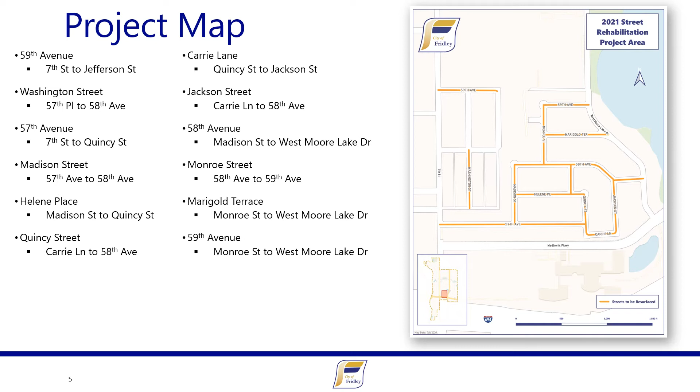The tentative schedule for the project includes a neighborhood informational virtual presentation, which you are currently watching now, and an opportunity for resident feedback through phone calls, emails, or meeting requests with staff on site through the end of September and the first couple weeks of October.

Staff will then take the feedback received and create a feasibility study and set the improvement hearing date for the October 25th council meeting. We will then have the preliminary assessment hearing at the November 22nd council meeting, and award the project to a contractor in February of 2022. We will plan on beginning construction around May or June of 2022 and plan on completing the project in September of 2022.

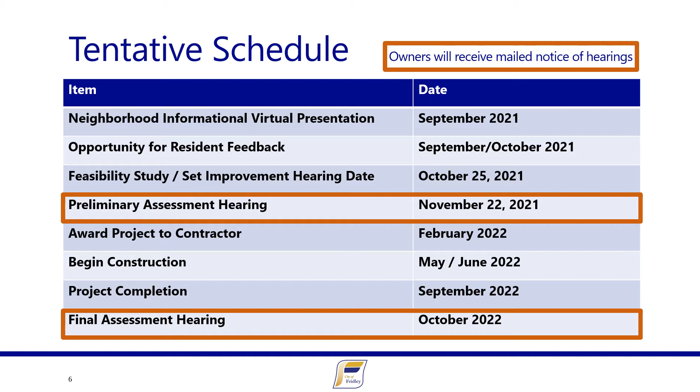This project is included in the city's comprehensive street plan. Council adopted the plan for maintaining the city's streets and alley system. Fridley has approximately 81 miles of local streets and alleys. The city has spent $4.1 million in pavement rehabilitation over the last 5 years. On the right side of the screen, you can see the city's 10-year outlook in the street resurfacing plan. The area in the circle bubble is the 2021-01 street project.

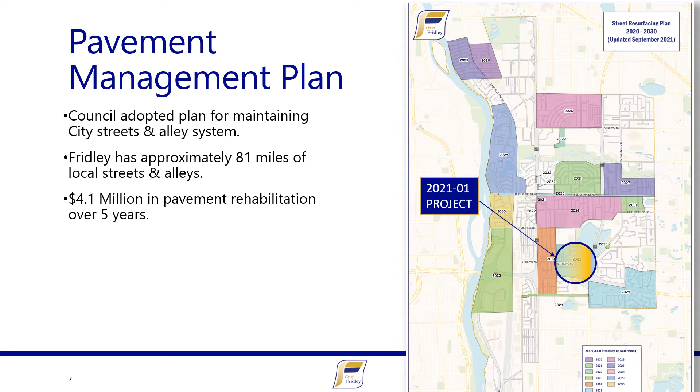The comprehensive street plan is created based off the street program analysis. When considering selecting a project, we look at the items below; the items in bold are the main reasons for the 2021-01 street rehabilitation project. We consider the street condition and ranking, which we do yearly inspections of the streets in the city. We look at the time since the last major maintenance, which in this case for the neighborhood, the original construction was in the 1960s and 70s.

with a little bit of seal coat happening in the early 2000s. We work with our Public Works Street Department on the high maintenance levels, and we look at the available funding for the project.

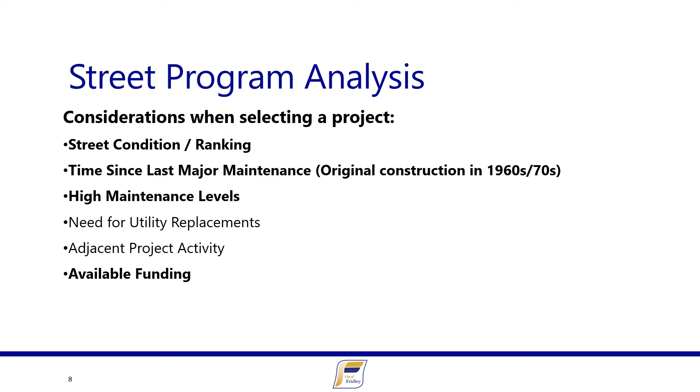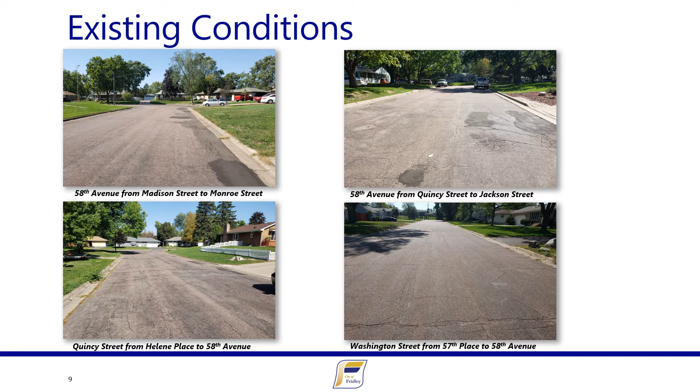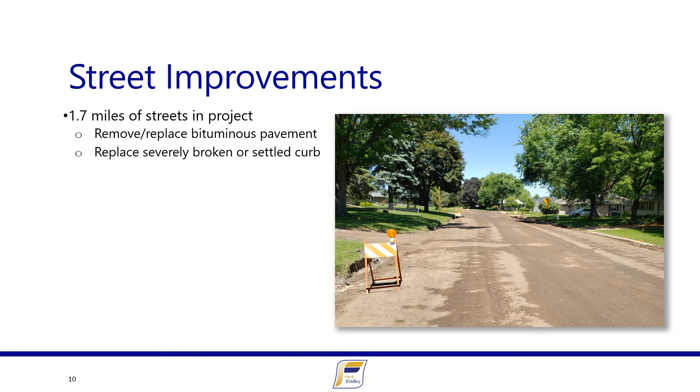Street improvements include 1.7 miles of streets in the project, where we will remove and replace the bituminous pavement, and we will also replace severely broken or settled curb along the project area.

There will also be utility work in the project area. This includes replacing the water main on Marigold Terrace from Monroe Street to West Moore Lake Drive. We anticipate no sanitary or storm sewer work, as they are in good condition. We will work with other private utilities in the area to make sure any work they need done gets done before the street project is completed, so they aren't coming back and ripping up our brand new street.

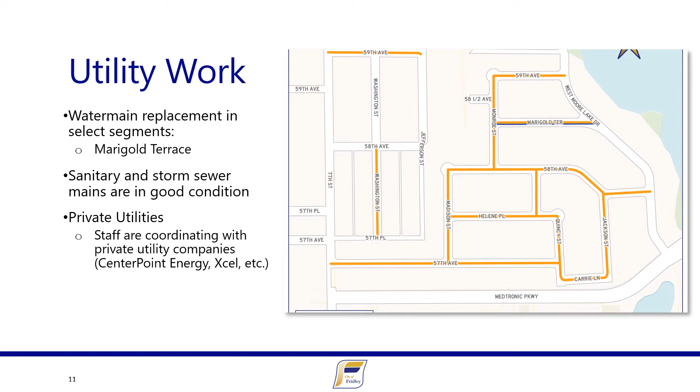On-street parking: we ask that you please do not park on the street during construction.

Temporary water shutoffs: city water will be required to be temporarily shut off during hydrant and valve replacements. This might require a shutoff for a few hours while they're doing the work. During water main replacement, areas will be placed on temporary water for a short period of time until the work is completed.

Project updates and notifications: residents will receive notification prior to significant work. This will include major project milestones, road closures, water shutoffs, utility repairs, and driveway coordination.

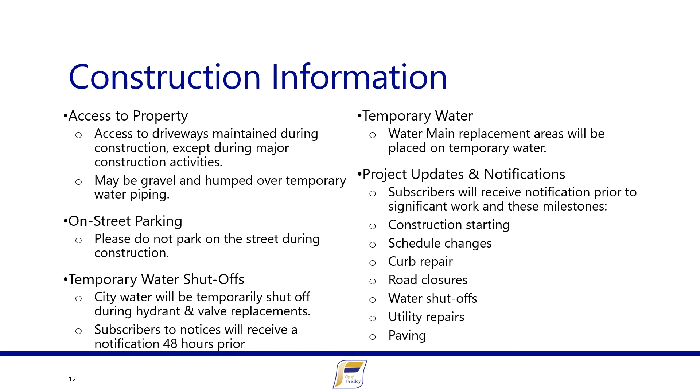Proposed special assessments are part of the project. We have two different types of special assessments. The first is low density residential, LDR, which includes lots with 4 or fewer dwelling units. The assessment is based on a per lot basis, and LDR units receive an equal assessment.

The second is non-low density residential, NLDR, which includes commercial, industrial, manufacturing, tax exempt, institutional, and medium and high density residential lots. Frontages will be assessed actual project costs based on lineal footage of streets being maintained adjacent to front, side, or rear lot sides. For this project, all lots are part of the LDR special assessment.

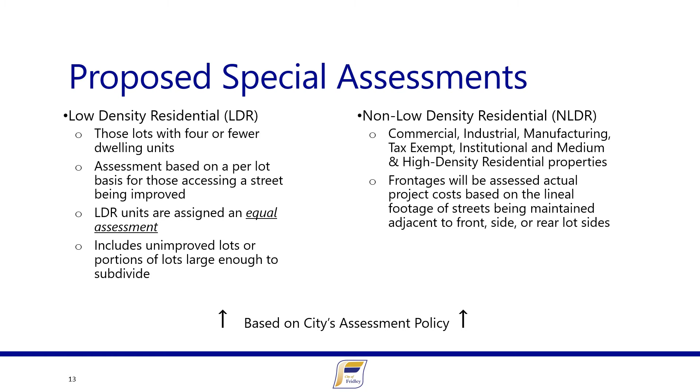Here is a map of the assessed properties on the right side. The parcels being assessed have a black box around the property with their address number in them. We have 162 properties that are going to be assessed under the low density residential.

Under our policy, the properties being assessed are those that have driveways connected to the streets being resurfaced, and assessments are based on actual construction costs.

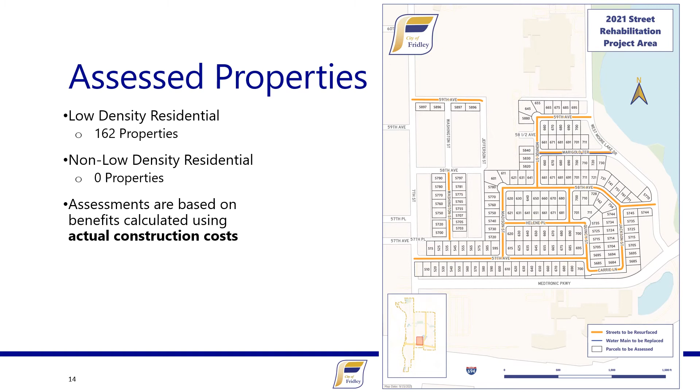Here's a look at the LDR property assessment history based on our recent projects with special assessments. As you can see, the special assessments range between $2,000 to $2,800 for most of our reconstruction projects. We have a note for the 1701 and the 21-02 projects, which were mainly mill and overlays, where the special assessment was around $1,800.

The 2021-01 street rehabilitation project is going to be a reconstruction project, so we would anticipate the special assessment will be in the range of $2,500 to $3,000.

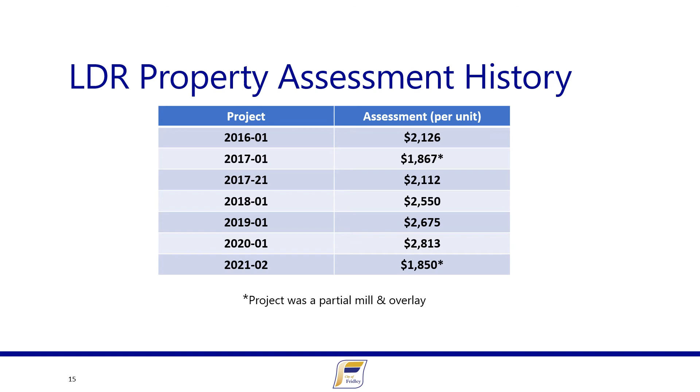Payment options for the special assessments include option 1: you can pay a lump sum payment within 30 days of the final assessment hearing, which would be in October or November of 2022.

Option 2 is to have the amount assessed to the property taxes and paid over a 10-year term, with an interest rate to be calculated by the finance director as 2% over prime. Recent interest rates from last year's construction project had an interest rate of 5.25%.

Option 3 is that senior citizens meeting certain criteria may request to have the assessment deferred until the future sale of the property. To qualify, you'd need to be 65 or older, meet certain income levels, etc. Interest does accrue until the property is sold.

What to expect during construction? The next few slides will have photos and discuss different aspects of the project.

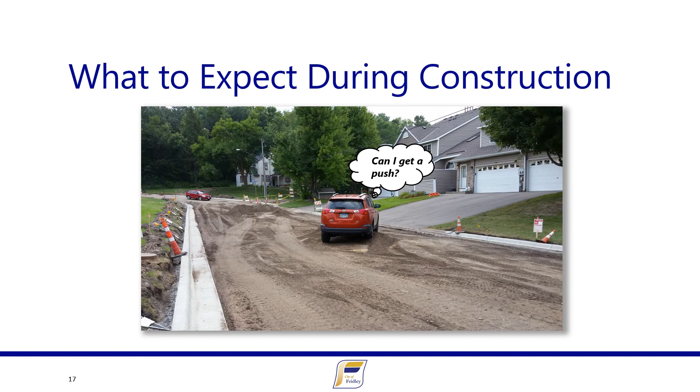The first item is temporary water. In the areas where we will be replacing water main, we will put those affected houses on temporary water to allow continued water supply while the water main is being worked on. You may see an above ground pipe connecting to each of the affected houses for the temporary water.

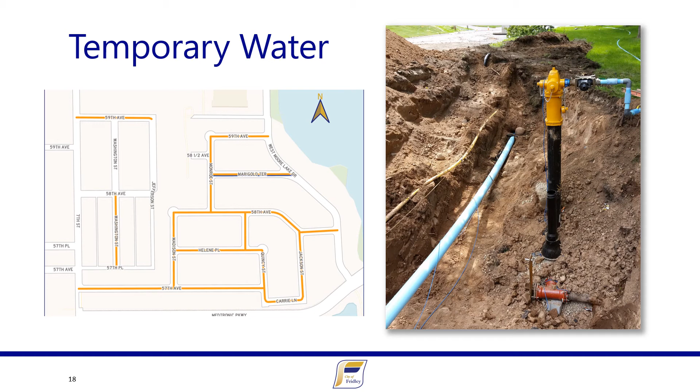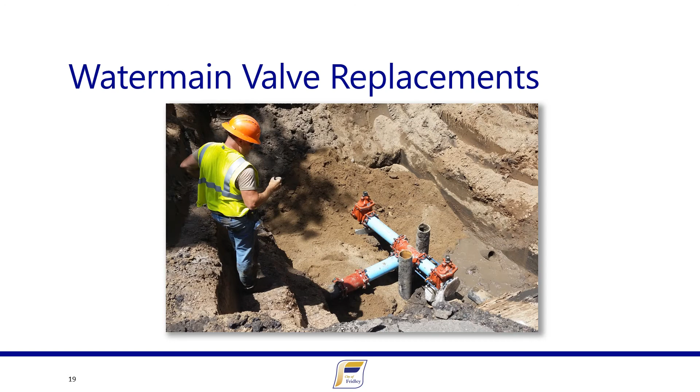You may also see some of the water main valve replacements. These valves could be in the street or in the boulevard, in the areas where the water main replacements are going to take place.

For the water main replacement, the contractor will dig down to the location of the existing water main, generally 7 to 10 feet, and replace the old pipe with the new pipe in those areas shown on the map earlier for water main replacement.

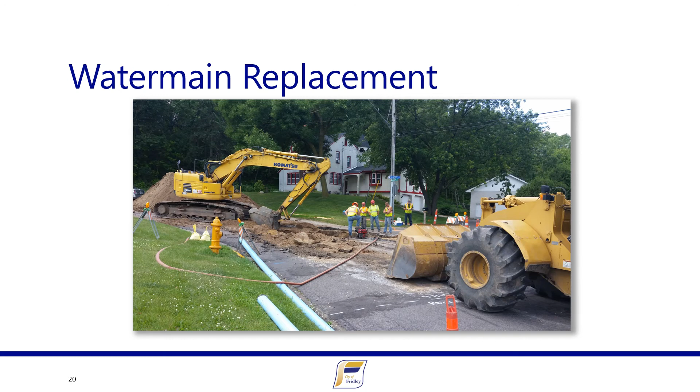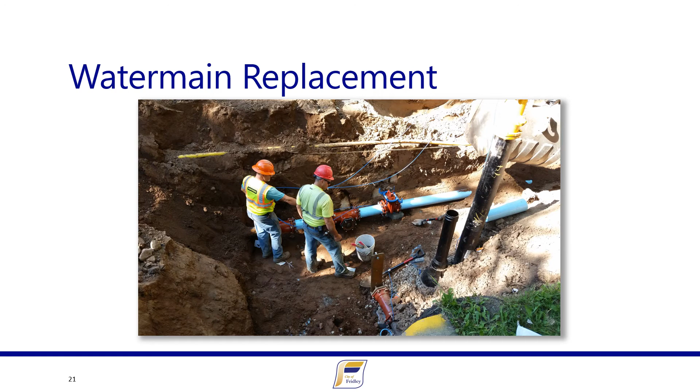Here's another photo of the water main replacement taking place. As you can see, the contractor will dig down 7 to 10 feet around the other existing utilities to replace the old pipe with the new pipe.

Along with the water main replacement and the water main gate valves being replaced, we also might be replacing the fire hydrants in certain locations as part of the water main work.

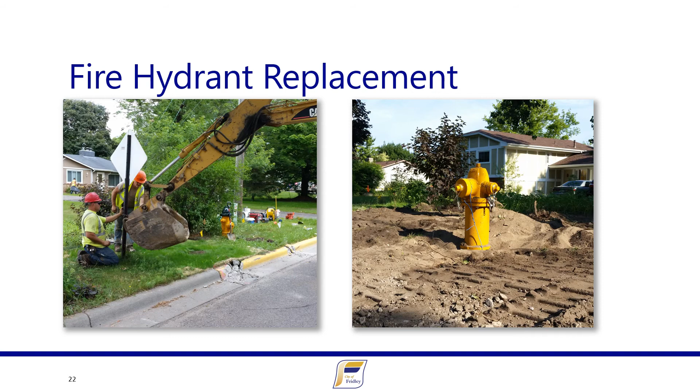We might also do spot curb removal and replacement. We will go out and inspect the curb lines along the corridor for any damaged, broken, settled, or drainage issues for the curb lines in the project area. We do not replace all of the curb, only the curb that needs to be replaced.

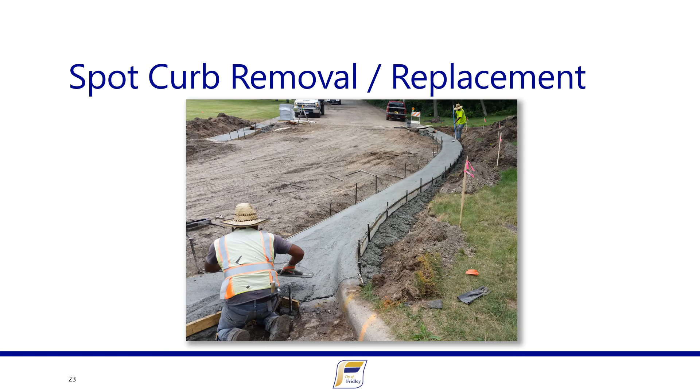The streets in the project will have asphalt reclamation for removal. This process includes pulverizing the existing bituminous surface and the aggregate base together about 8 inches down to create a new aggregate base material.

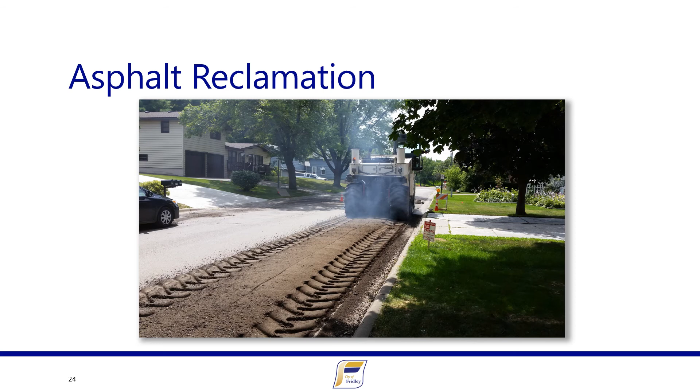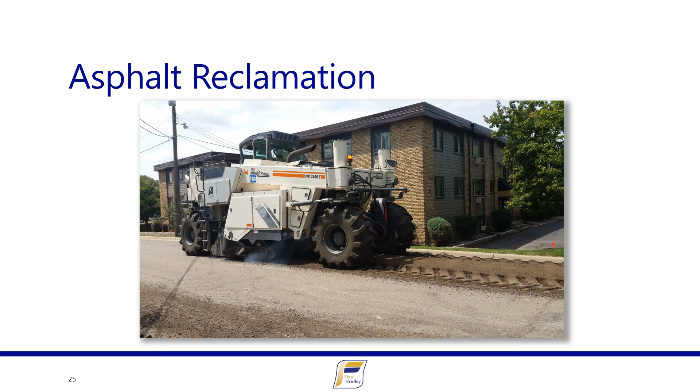Here is a photo of the asphalt reclaimer going through and doing the reclaiming process, and here is a photo after the reclaiming process is done. We will have a gravel road for a short amount of time while the contractor works on the utilities and the curb replacement in the project area.

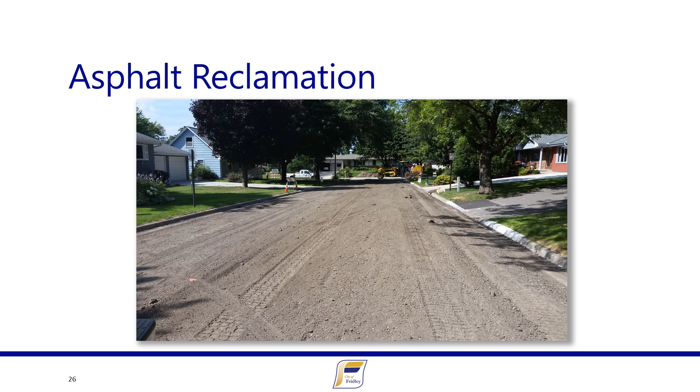After the reclaiming process is done, the contractor will come through and grade out the aggregate base. The contractor will remove the excess reclaim off-site.

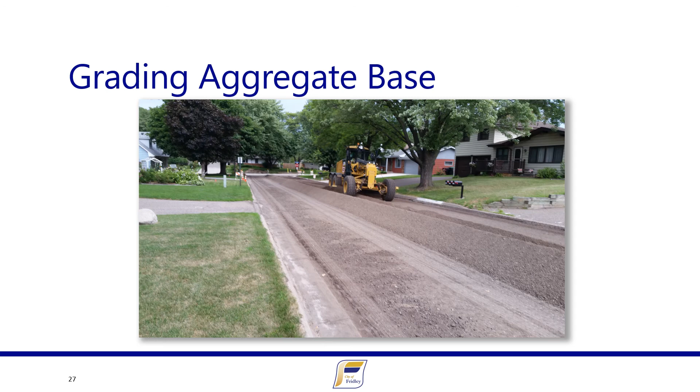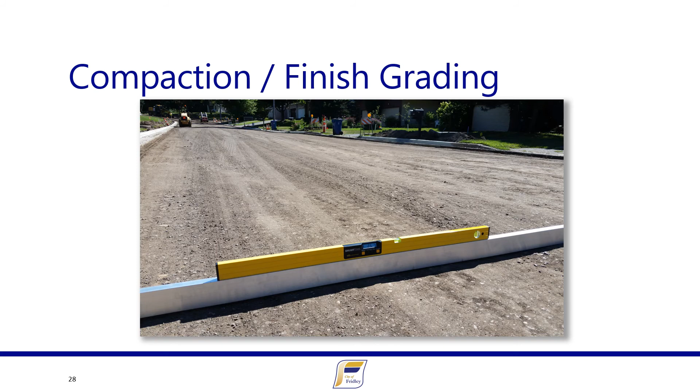After the contractor is done grading and the utility work is done, the contractor will finish up with the grading and compaction to get the base ready for the first lift of asphalt. On the reclaimed streets, once the utility work, grading, and compaction are done, the contractor will come in and pave the base course, the first lift of asphalt.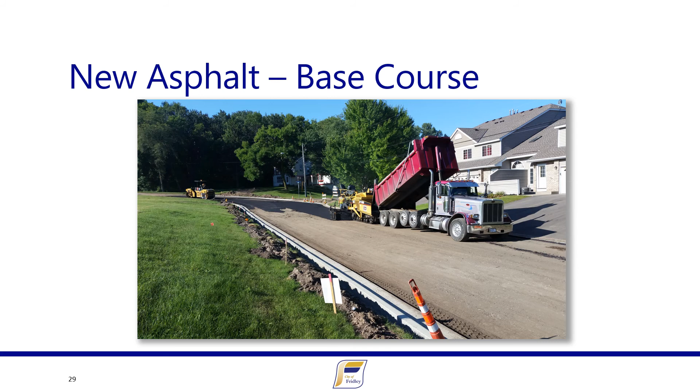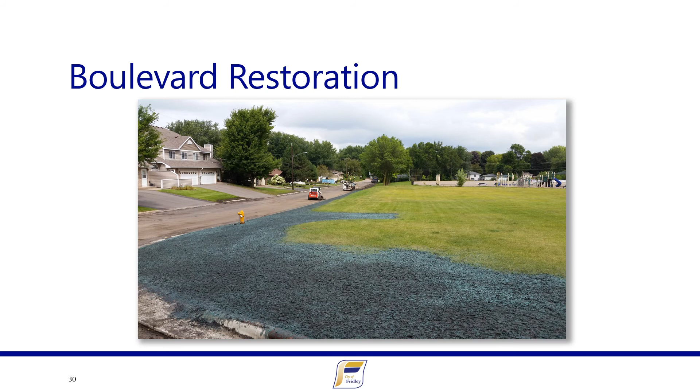After the utility work is completed and the first lift of asphalt is paved, the contractor will begin the boulevard restoration. Restoration will include all areas disturbed during construction in the project area. After the restoration has been completed, the contractor will then come in and pave the final lift of asphalt.

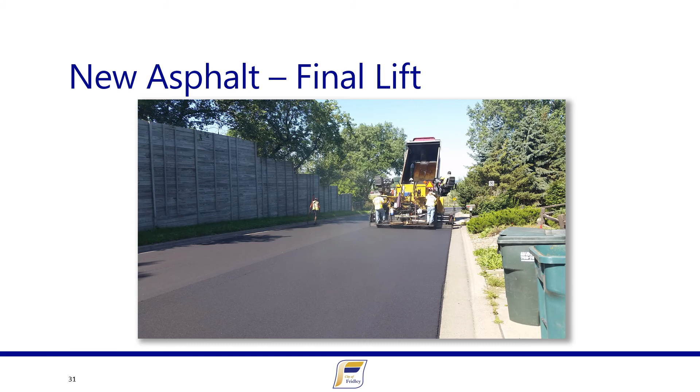After we put down the final layer of asphalt, we cut the streets and fill them in with an elastic rubber asphaltic agent. These cuts are made about every 40 feet and at manhole and gate valve locations.

With the freezing and thawing in Minnesota, things move and you end up with cracks across the street. Even on a brand new street with a new gravel base, the street will move and you will get a few cracks starting the first winter.

When we make these saw cuts, we tell the road where to crack on a nice clean line. Water is sealed from getting into the crack and causing further damage. It really adds to the life of the street.

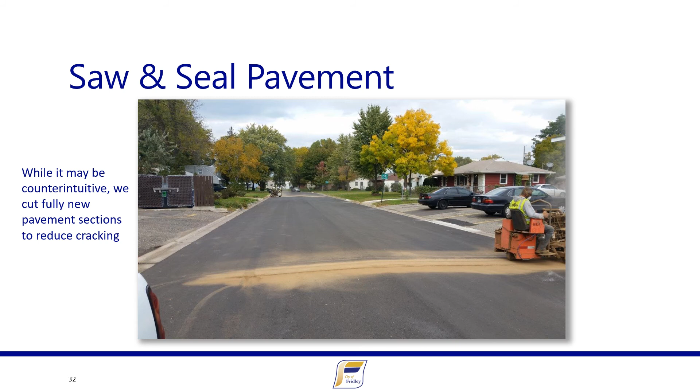The questionnaire helps us with the project. It asks if you have a sprinkler system, invisible pet fence, any plans for driveway or private utility repairs, any water or sewer service issues, a home business, or any dates of special events, family gatherings, graduations, etc. that we need to know about that could impact construction. It also asks about any existing utility or drainage issues, or any special access needs.

Thank you for watching this virtual presentation on the project. Please contact the engineering division if you have any questions or concerns.